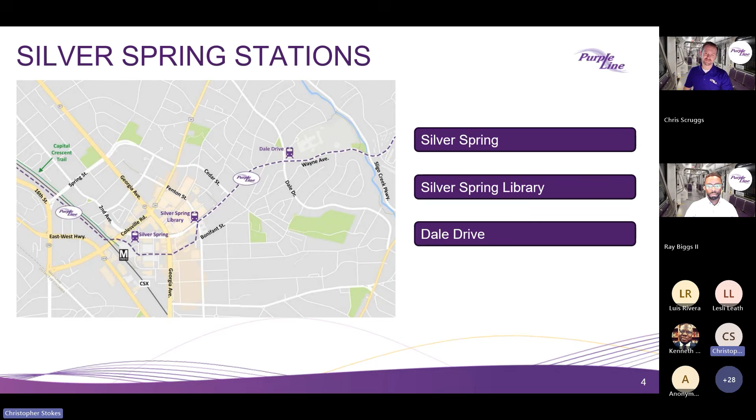Thank you, Chris. Welcome everyone again tonight, and thank you for joining us this evening for our CAT meeting. As you're about to see in our new fall 2025 progress video, the momentum on the Purple Line in 2024 has evolved into a tremendous transformation throughout 2025. This video highlights some of the transformational progress across the 16-mile Purple Line alignment. So let's go ahead and play the video, Chris.

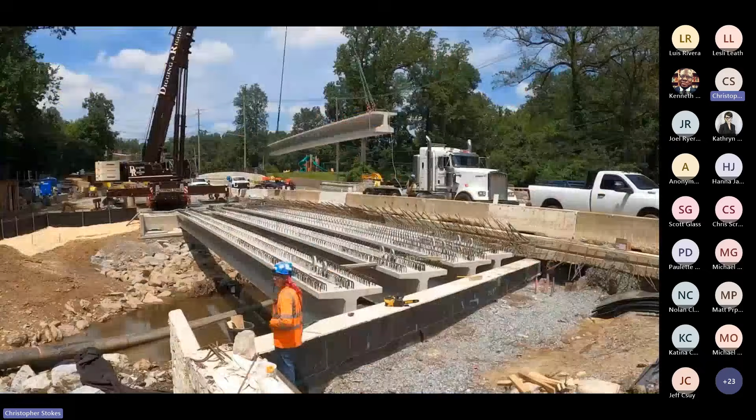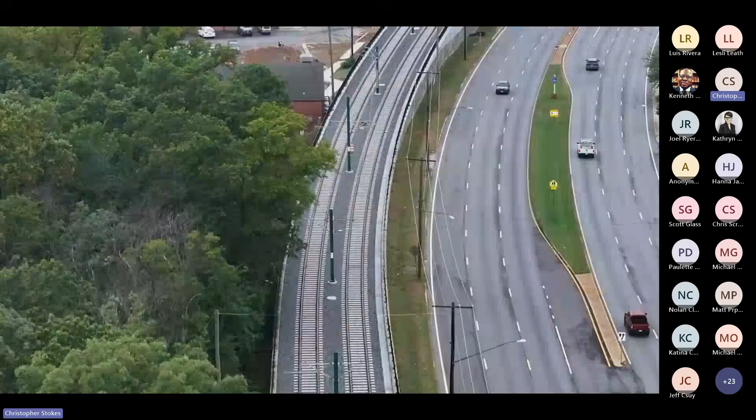It has truly been the year of transformation for the Purple Line project. With construction now more than 80% complete, the new Purple Line tracks tell the story. We are excited to share that tracks have been installed across all of Prince George's County, with more than 75% of tracks complete across the entire project.

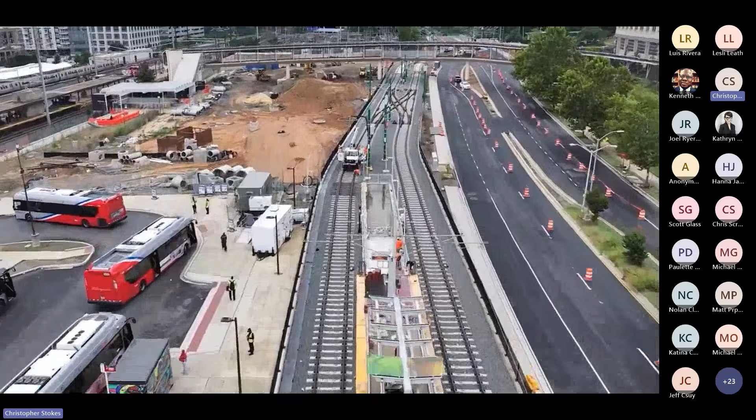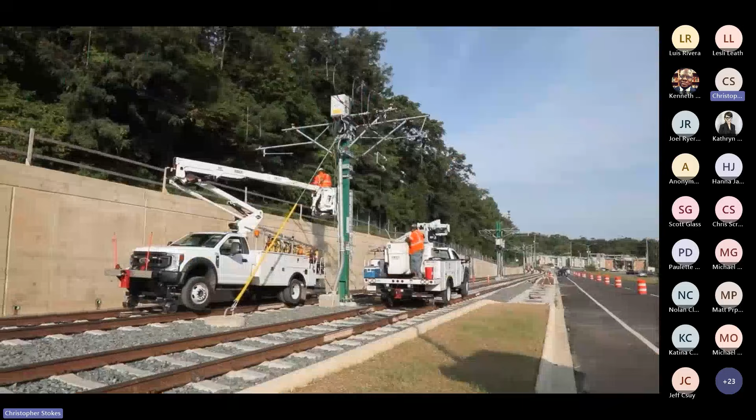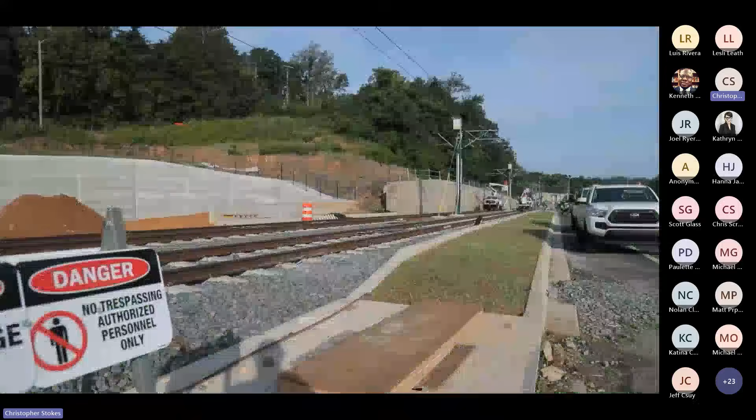Along with track installation, you have likely seen many overhead catenary system poles installed this year. These poles carry the wires that power the Purple Line. At the eastern end of the project, the poles and wires are not only installed, but have already been energized, ready to power up the light rail vehicles. Just a reminder, always assume light rail system power is on. Please be sure to avoid the Purple Line right-of-way areas. Only cross at designated areas and crosswalks, and be sure to look both ways before you cross.

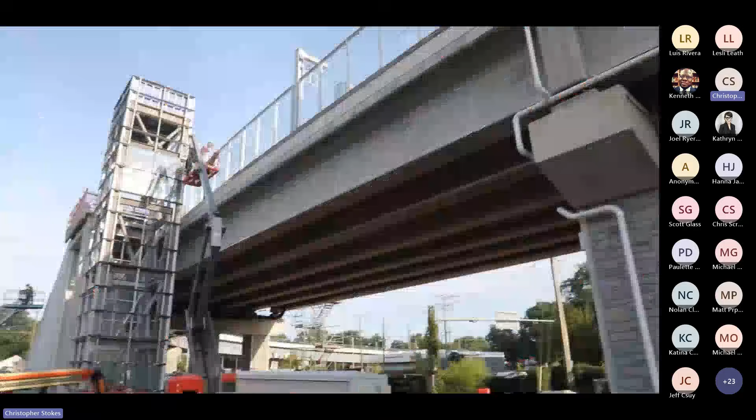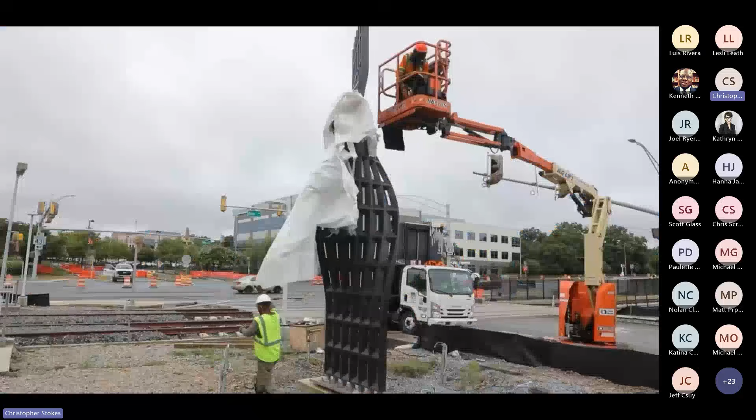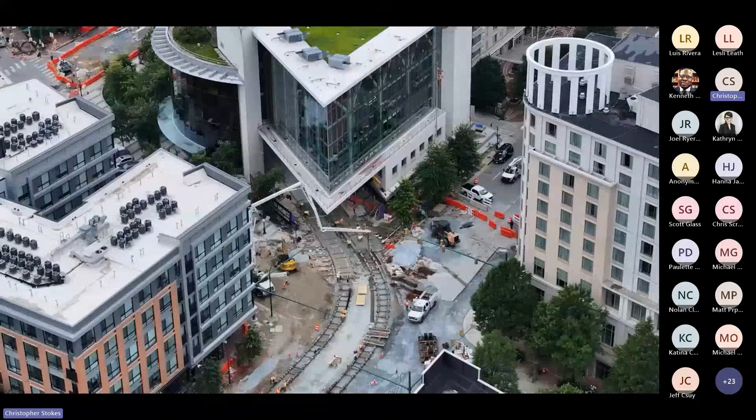Across the corridor, stations continue to progress. Canopies, benches, and Art-in-Transit installations are being added. Bronze spires in Riverdale, vibrant colors in Long Branch, and more to come. More than 20 roadway crossings that once required detours are now in their completed phase, including the complex intersection of Wayne Avenue and Fenton Street. With the tracks in place, Silver Spring residents can see the vision of a more connected community becoming reality.

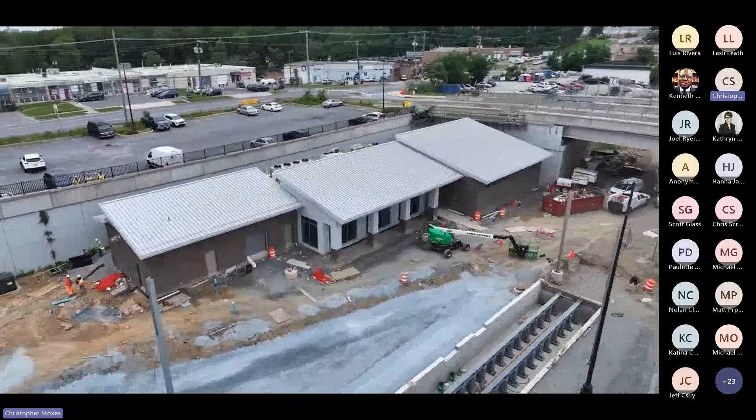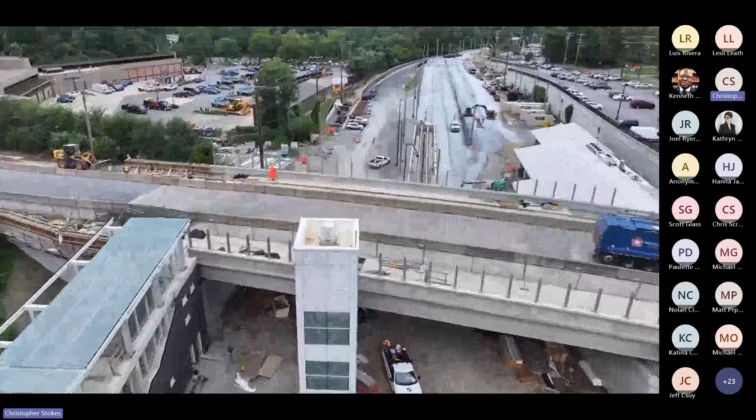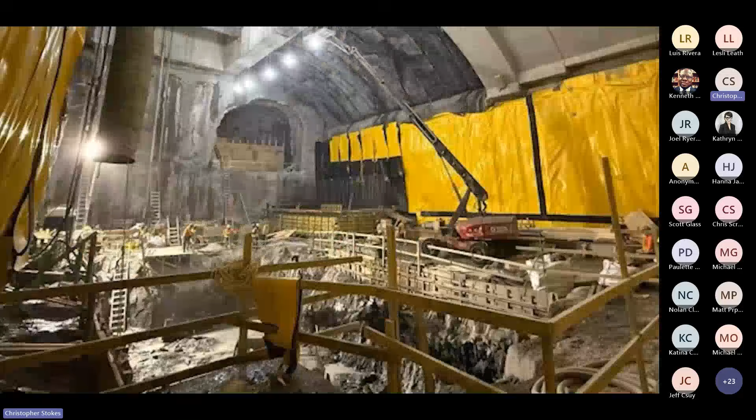In Lyttonsville, the second operations and maintenance facility is taking shape. This building and track yard will support the light rail vehicles with an additional control and communications facility and a smaller maintenance facility located in Montgomery County. Another major milestone is the completion of blasting in Bethesda. After years of excavation, the shaft and cavern, located nearly 150 feet, or about 15 stories underground, is finished. Crews are now focused on waterproofing and concrete work, building out the cavern and elevator spaces.

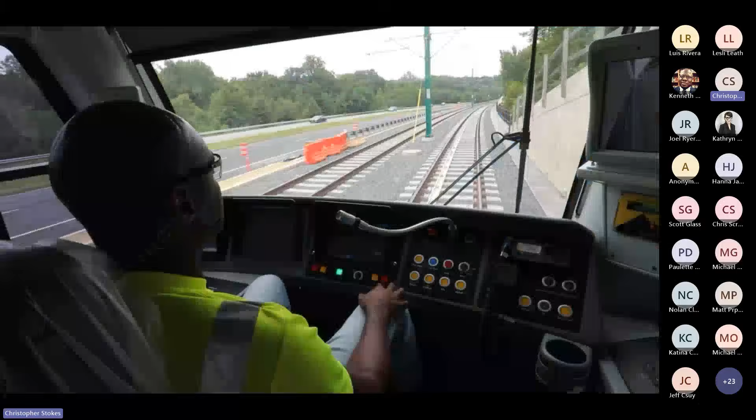Perhaps most exciting during our year of transformation, dynamic testing of the Purple Line has begun. Light rail vehicles are running during nighttime hours between the Glenridge Operations and Maintenance Facility and New Carrollton. The vehicles and track systems undergo rigorous checks of safety, operational, and communications. With New Carrollton testing underway, it won't be long before testing expands westward along more sections of the Purple Line.

Seeing a Purple Line light rail vehicle arrive at the first of our 21 stations is an exciting reminder of the hard work and dedication all of our teams bring every day to complete this transformative project. Thank you for your support, patience, and engagement over this past year.

We at Maryland's Purple Line are looking forward to coming to a station near you soon.

Thank you, Chris. Here you can see the timeline graphic with some of our upcoming major milestones, including our winter 2025 delivery date of all 28 light rail vehicles to the Glenridge Operations and Maintenance Facility on Veterans Parkway, and completing track installation in the spring of next year across the entire alignment.

Though I do want to highlight that all of the track has been installed on the Prince George's side of the Purple Line. Tonight, you will see and hear more details about the expanded dynamic testing milestone achieved earlier this summer, and where the Purple Line will expand its dynamic testing throughout this fall and into 2026.

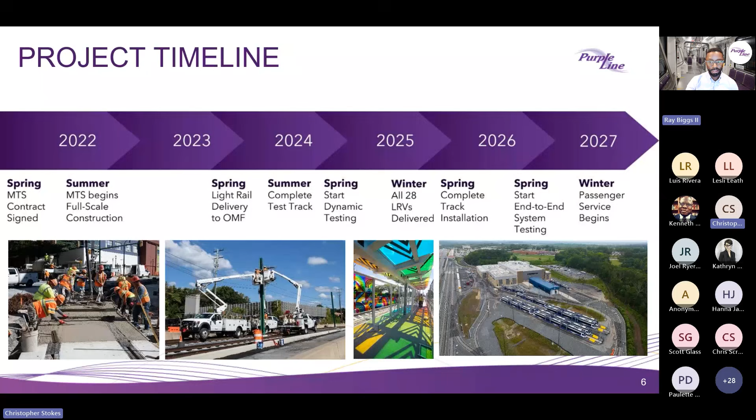Okay, thank you, Ray. I'll start here with our first slide, Wayne Avenue and Fenton, our update for the work in Silver Spring was a big milestone this summer.

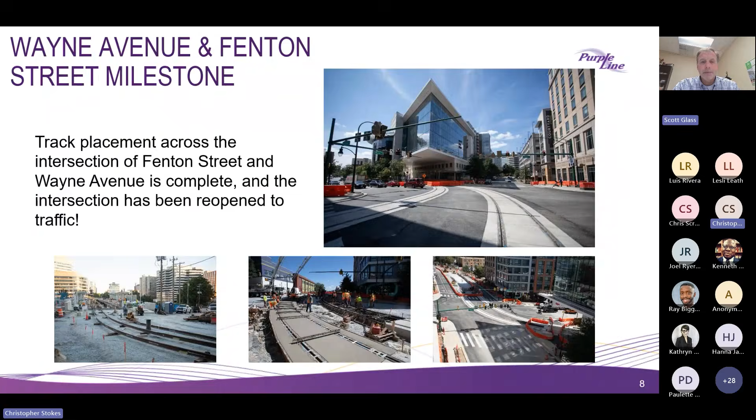We got the track placement across the intersection at Fenton Street and Wayne Avenue, and the intersection's been reopened to traffic. This was a lot of work this summer. It took a lot of coordination to be prepared in advance and prepare the community, but it did open as planned.

At the Spring Street Bridge, we've been working hard to get out of the ground, and we have recently completed the last of the remaining old bridge demolition. And just last night, we finished the installation of the girders over the CSX and Metro tracks.

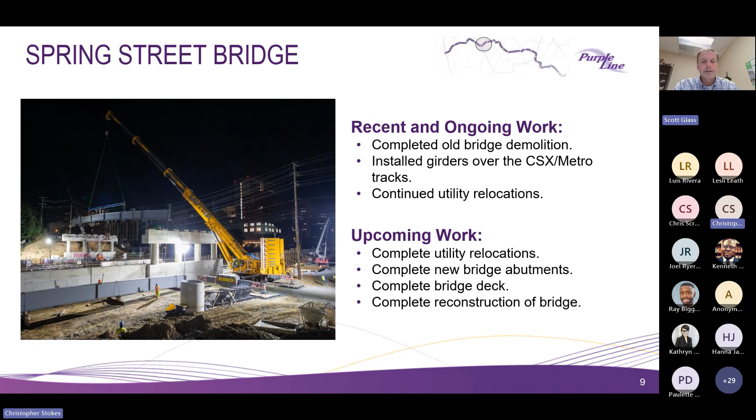And we will be continuing utility relocations, underground storm drain activity in the areas still underway. Upcoming work will be completing the new bridge abutments and the bridge deck, but also as the bridge deck gets placed, we'll be completing final utility relocations of these major aerial crossings and completing the reconstruction of the bridge for opening to the public.

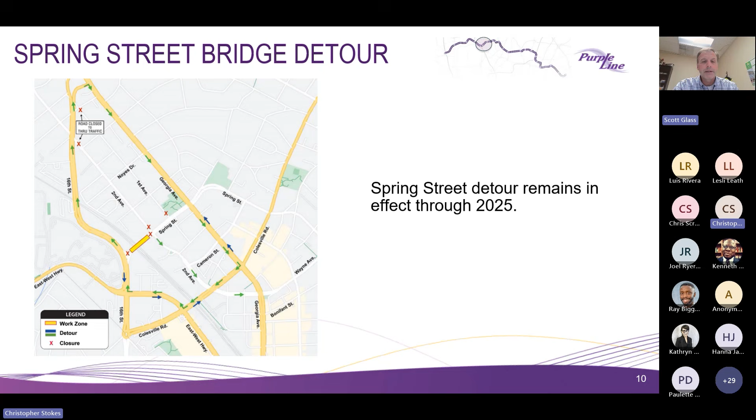Just down the street on Colesville Road, we have had a lot of activity underway on the LRT overhead bridge crossing. We've completed the construction of the light rail bridge ramp. We've begun the track placement at this point across the light rail bridge. And we're preparing for the overhead catenary across the bridge at this point.

Upcoming work will be completing and securing the rails across the bridge over the next month. And then we'll be moving into the overhead catenary installations across the LRT bridge.

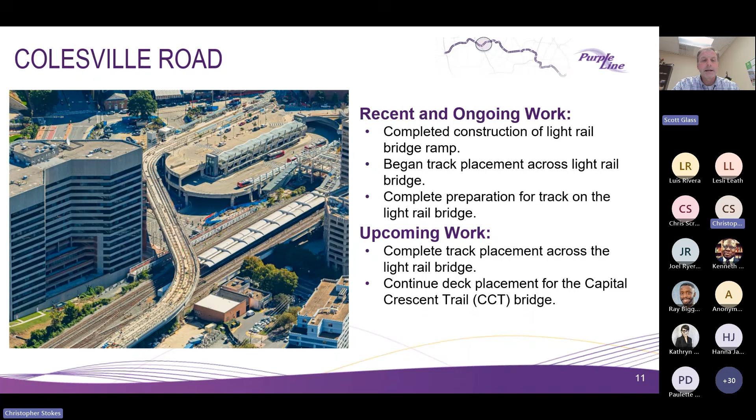And then we also have upcoming work that will complete the last span of the CCT trail over Colesville Road and the placement of the bridge deck across that Capital Crescent Trail pedestrian bridge.

The Silver Spring Station has been progressing as well. The station continues with utility installations, service utilities for water and sewer. We're continuing the elevator and stair access construction, particularly on the interiors.

The upcoming work will be continuing the finishes at the platform level on the station. We have all of the canopies and railings in place, and there are remaining elements to punch out with lighting and crossings at the station platform level.

We'll complete the construction of the stair and elevator mechanical systems in the stair access. And we'll be finalizing the track installation and the overhead catenary pole installation and wire crossings. Next slide.

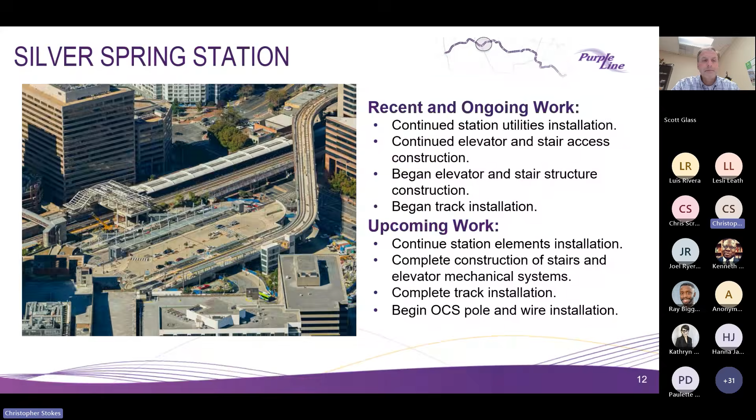At the Transit Center mezzanine structure, we've been continuing the work to complete the steel erection across the mezzanine level. We've installed the stair canopies and the escalator canopies. And we're continuing the placement of the structural elements on the roof of the steel structure.

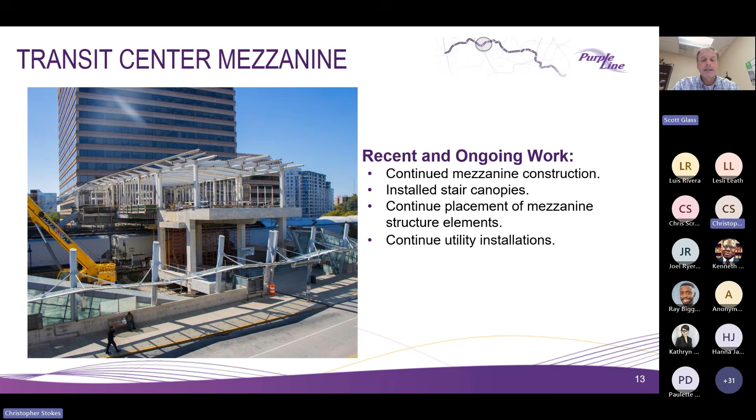In the coming months, we'll be completing the roof on that structure. We also have upcoming work with utility installations and retaining walls that are along the CSX tracks for the CCT trail. Next slide.

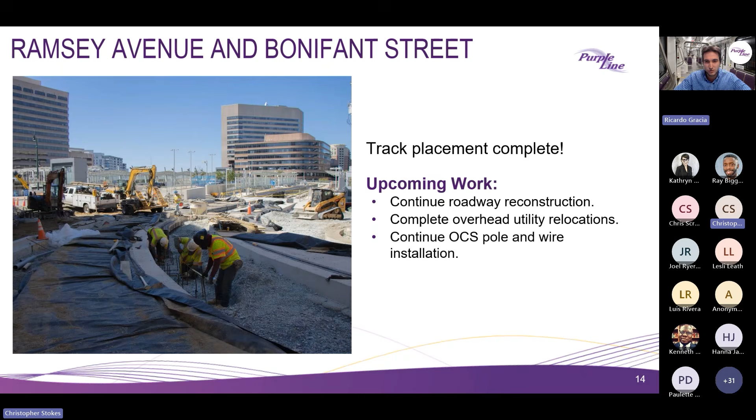Thank you very much, Scott. Good evening, everybody. Here in Ramsey intersection, we got the track completed, and we recently reopened the intersection. Coming up, we are going to continue the roadway reconstruction, completing the overhead utility relocations and the OCS poles and wire installation.

In Bonifant Street, there has been a lot of work happening recently. We completed the overhead catenary system foundations, the reconstruction of the roadway, curb and sidewalk on the north side of Bonifant Street, shifted the traffic to the north side of Bonifant, and continue the underground utilities on the south side of Bonifant Street, and install the traffic signals and pedestrian crossings at Georgia Avenue.

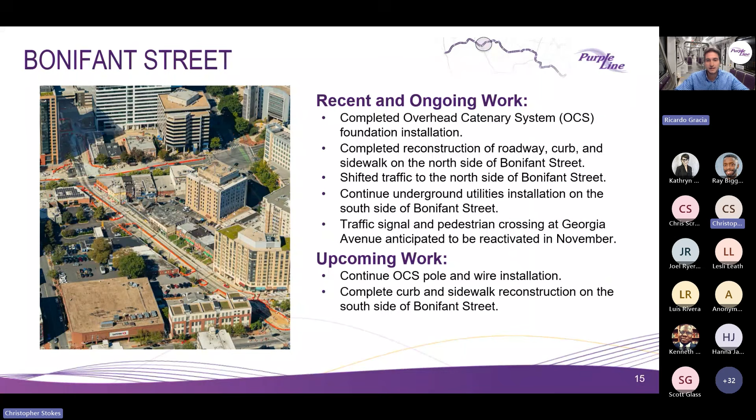We anticipate reopening the Georgia intersection in November. That includes 3 lanes of traffic in each direction. Coming up, we also have continuing the OCS pole and wire installation, and complete the curb and sidewalk reconstruction on the south side of the street.

In the Silver Spring Library, we completed the track installation along the library and the alleyway adjacent to the Bonifant building, and continued the installation of the pavers on the station platform.

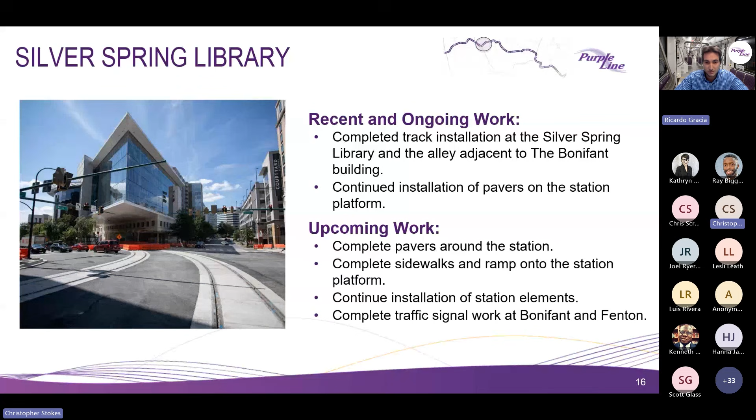Coming up, we are going to complete the pavers north and south of the station, complete the sidewalks and ramp going into the station platform, finish some station elements, and do the traffic signal work at Bonifant and Fenton intersection.

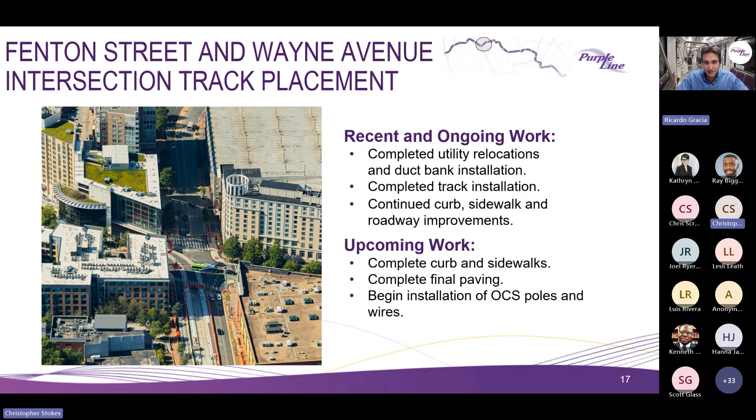At Fenton and Wayne Avenue intersection, we completed all the utility relocations and ductbank installation, finished the track throughout the summer, and continue the curb and sidewalk reconstruction. Coming up, we will complete all the curbs and sidewalks — we still have some pending — and perform the final paving and begin the installation of the OCS poles and wires.

On Wayne Avenue between Fenton and Dale, we have completed the reconstruction of all retaining walls and all OCS foundations. We finished all the ductbank installation and are currently almost finishing the storm drain and sewer. Right now we only have the remaining portion at Cedar intersection.

We established a work zone in the center of Wayne Avenue to continue with the track installation. Coming up, we will complete the storm drain and sewer around Cedar, complete the track installation from Dartmouth to Fenton, and complete the installation of the OCS poles and wires.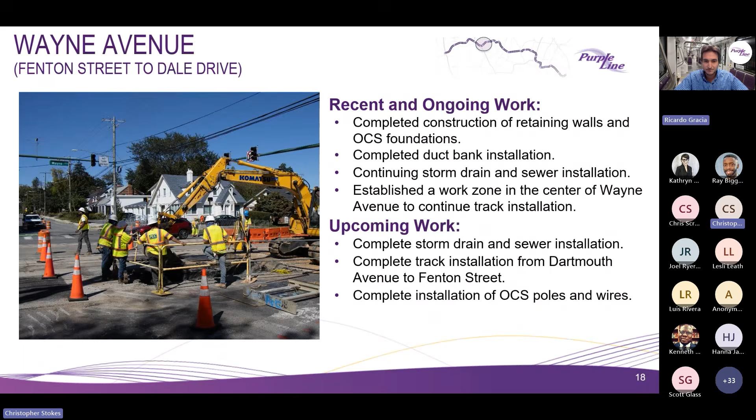From Dale Drive to Sligo Parkway, we have been working on completing the track and ductbank installation, the OCS foundations, and continue working on sidewalk and roadway reconstruction, building the curb and sidewalk especially on the west side of Dale Drive station between Dale Drive and Cedar.

Coming up, we are shifting the traffic to the permanent configuration. We still have quite a lot of remaining sidewalk and curb to finish the reconstruction, and complete the installation of the OCS poles and wires.

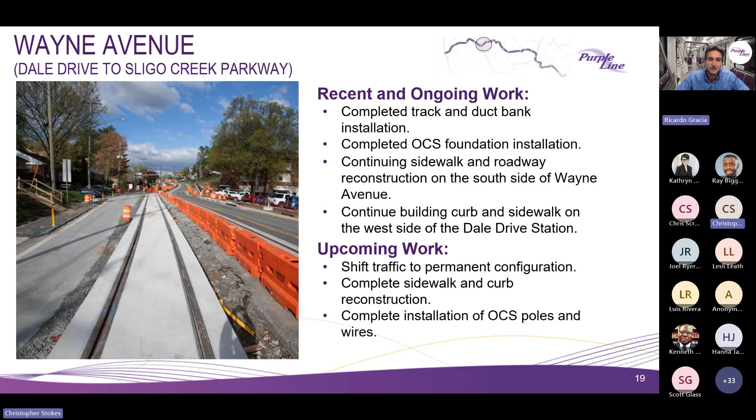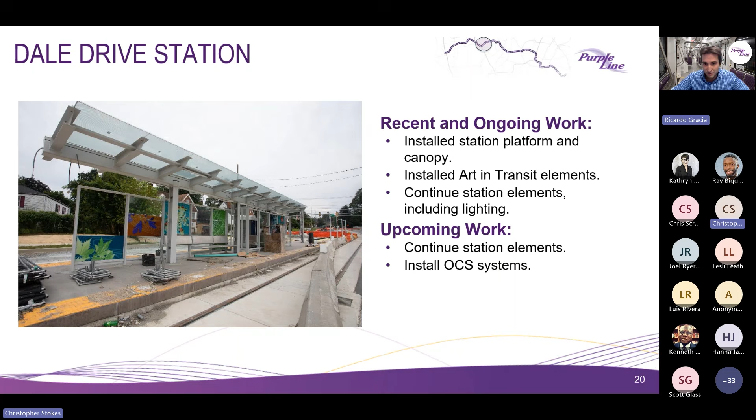In Dale Drive, we installed the station platform and canopy. You have probably also seen the arts in transit elements, and we continue the station elements, including the lighting. Coming up, we have some finishes that we need to perform and installing the OCS systems.

In Silver Spring International Middle School, we finished all the stormwater management facilities during the summer shutdown of the school. We also completed the last wall adjacent to the parking lot, and finished the utility work to the traction power substation. Coming up, we will finish the curb and sidewalk.

Inside the school next to the wall, we finished it — it's actually happening this weekend, taking the opportunity of the 2 days of break. And we will continue the OCS wire and pole installation and the landscape elements around the school.

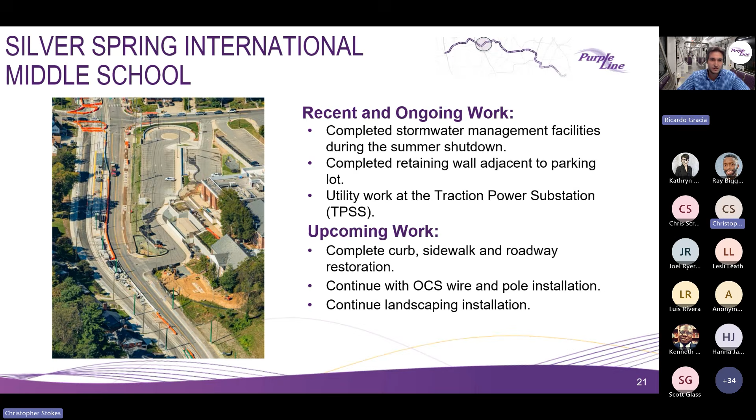In Sligo Bridge, we have been working very hard to complete it. We recently completed the construction of the stream and western abutments, installed the girders, completed the construction of both approach slabs, and overall we are continuing working on phase 2 of the bridge, which is the south side.

Right now we are working on installing the track along the bridge and on the intersection of Sligo Parkway. We will continue — we are first starting on both sides of the bridge, and then we will finish the portion along the bridge. Coming up, our main focus is to open the bridge to traffic.

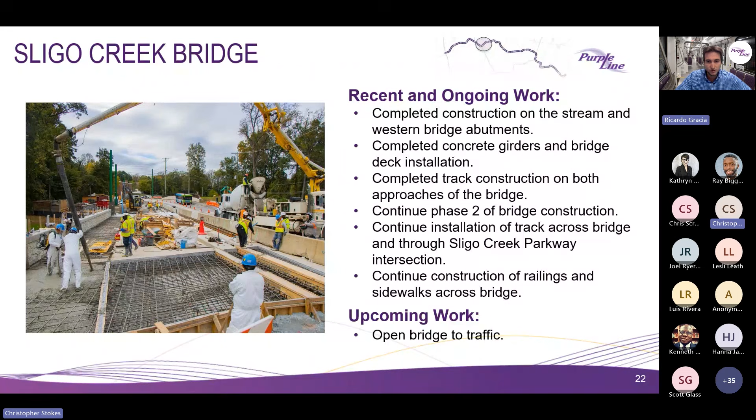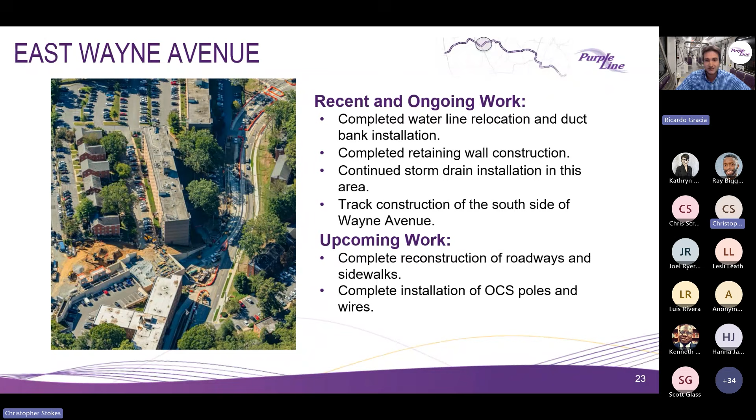On East Wayne Avenue, we completed the water line relocation and ductbank installation, the retaining walls construction; all the storm drains are finished right now, and we continue working on the track construction on the south side of Wayne Avenue. Coming up, we will complete the reconstruction of roadways and sidewalks and the installation of the OCS poles and wires.

We have two traffic detours in place right now. The first one is at Manchester and Sligo Parkway to Manchester Place. Sligo Parkway will remain temporarily closed between Wayne Avenue and Piney Branch Road, and this is expected to last 2 months. Sligo Creek Trail remains open with a detour to the public.

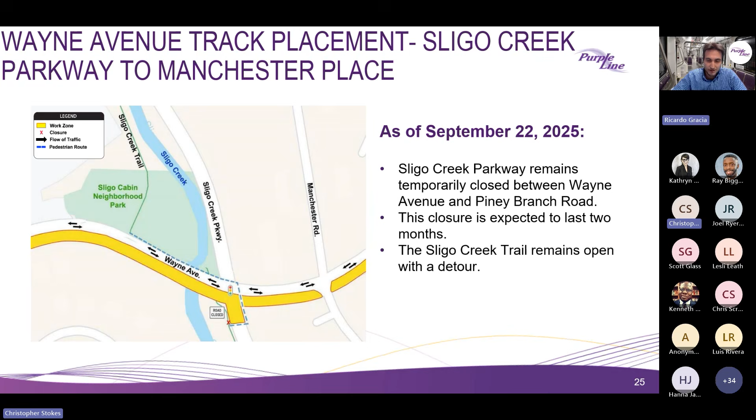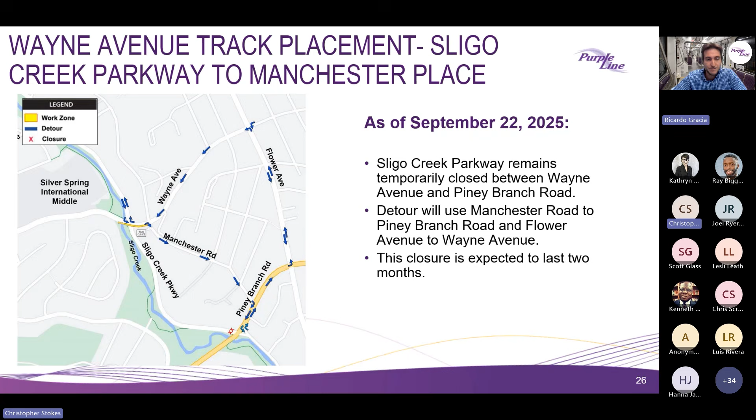This is the detour plan of Sligo Parkway. Pretty much, we're using Manchester Road and Flower Avenue to detour all the traffic, and the rest of the parkway remains open. We are only closing this section.

In Dixon Avenue, we recently closed it, and it will remain closed until January 2026. Ripley Street to Ramsey Avenue is already open, so access to the parking garage and business on Bonifant Street West will be maintained, and pedestrian access will also be maintained.

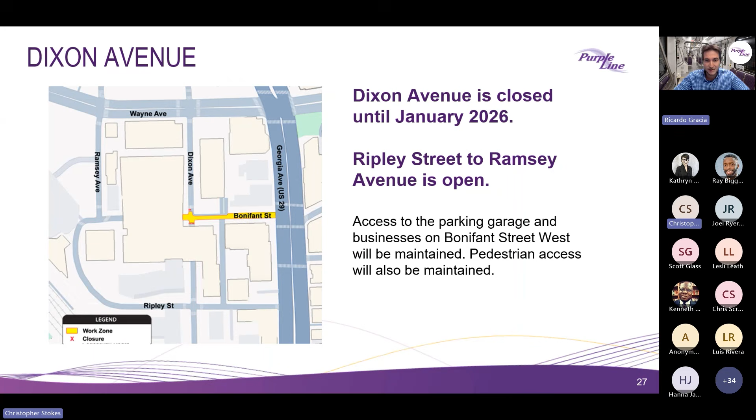Thank you, Ricardo and Scott, for that detailed update on the construction through this segment. Matt will now provide us a systems and testing update. Matt, over to you.

Good evening, everyone. To start off our systems and testing phase portion of the update, we'd like to share with you a brief video of some of the exciting testing that's ongoing throughout the eastern limits of the project.

Welcome to the Purple Line. Next stop, New Carrollton.

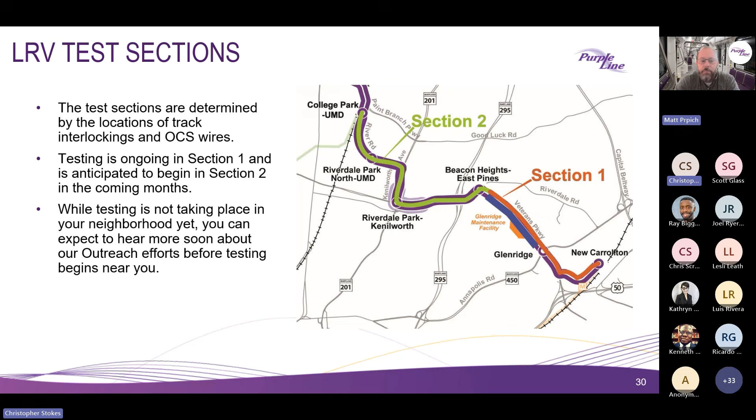What to expect during testing? Maintenance of traffic, or MOT, is a big part of what the public will encounter during the testing phase of the project. Until all of the traffic control systems are operational and certified, we'll have maintenance of traffic crews and uniformed police officers in place to keep everyone safe during the testing phase.

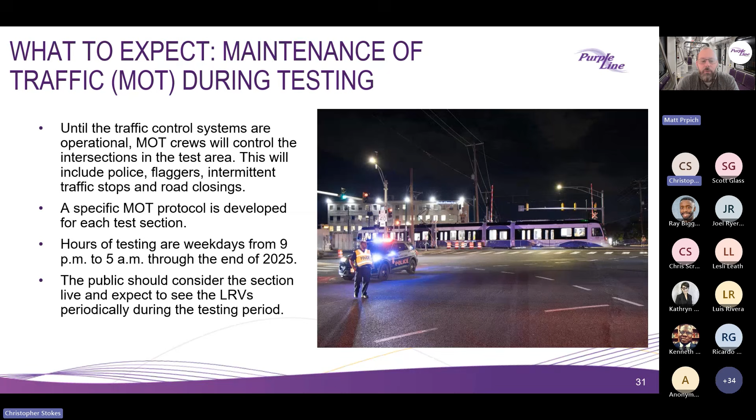This will include intermittent traffic stops and road closings. A specific maintenance of traffic protocol is developed for each test section. Hours of the testing are 9 p.m. to 5 a.m., and the public should consider the sections live and expect to see LRVs periodically during the testing periods.

Outreach. The outreach program focuses on communications to the community, coordination with State Highway Administration and other parties, advanced communications to elected officials, variable message boards will be utilized to communicate, in-person outreach at schools, local businesses, and impacted communities, public notices, posted updates on purplelinemd.com, and our safety-focused social media campaign.

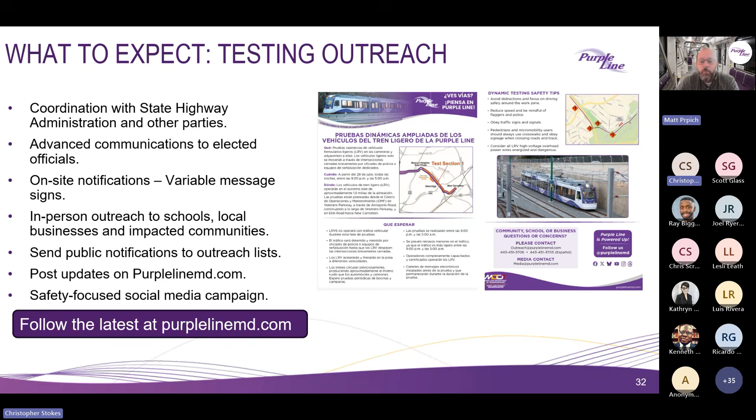Safety during testing. Last but not least, during and after testing, it's important to remember that the public should consider the track and OCS wires live and expect to see the LRVs moving day or night during these testing phases. Important safety reminders include obeying traffic signals, looking for the LRVs when crossing the track, using only approved crosswalks, not walking on or near the tracks, and not stopping or parking a vehicle on the tracks.

As a general reminder, the overhead catenary system does carry 1500 volts DC. Assume that all of the OCS wires, as they get installed, are live and extremely dangerous at all times.

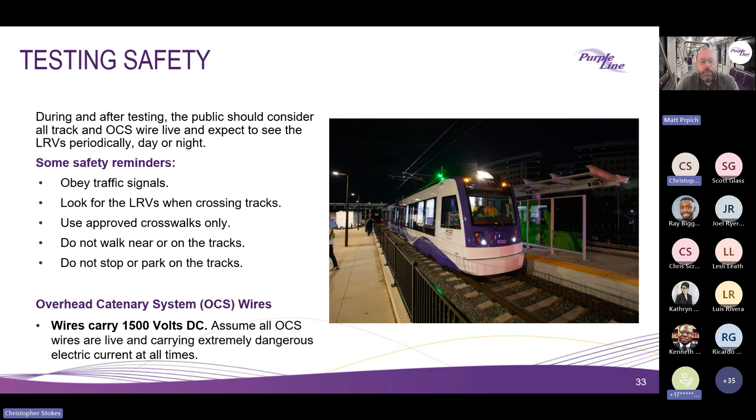Thank you, and back to you, Chris. Thank you very much, Matt. Appreciate that. We're going to talk through a couple of different community engagement slides here.

Planning is currently underway with our partners for 2026 opportunities to increase community engagement and awareness.

Speaking of University of Maryland Day, this is a bike and scooter safety campaign that we launched first on the University of Maryland campus to inform students how to interact with tracks safely. This will soon be rolled out further along the alignment.

But when crossing Purple Line tracks, please remember to use crosswalks where possible, crossing at right angles perpendicular to the tracks as pictured here. Do not ride parallel in the trackway, as tires can get caught, and always use extra caution when it's wet or frozen outside, as the rail can be slippery.

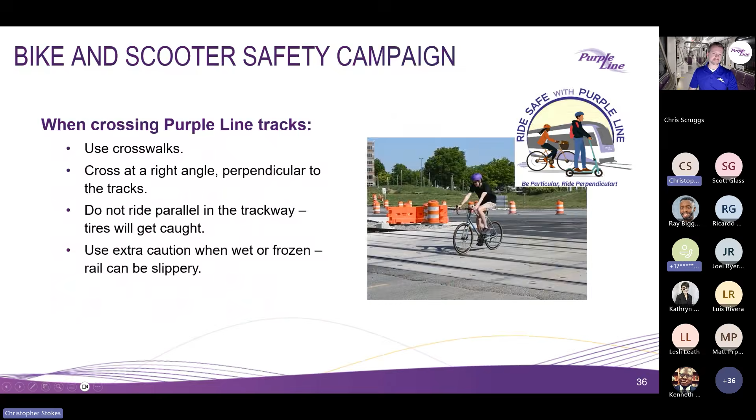Our outreach team has started monthly individualized phone calls to CAP members along the alignment and will soon reintroduce CAP member listening sessions. Our outreach team did broaden distribution efforts for this fall series of CAP meetings to include outreach and distribution at local community centers, libraries, and coffee shops. Outreach also implemented feedback from a post-CAP meeting survey sent after the spring series of CAP meetings, so you can expect to see a post-CAP meeting survey in the coming weeks as well.

With that, I will pass it over to John to talk us through our Beyond the Rails grants. Thank you, Chris, and apologies, folks, my camera is not behaving this evening. But with regard to Beyond the Rails, we're always excited to talk about our grant program, which we established to provide nonprofit groups with additional funding to continue improving our local community.